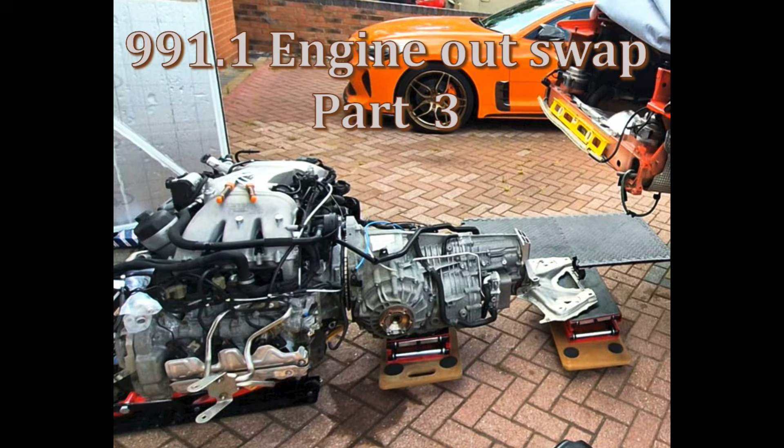Thanks for joining me. Welcome back to this series where I'll be removing and replacing, and then repairing eventually, the old motor in a Gen 1 991 GTS. So this is part 3 where I'll be hoping to install the replacement engine. Can I get it back on the road?

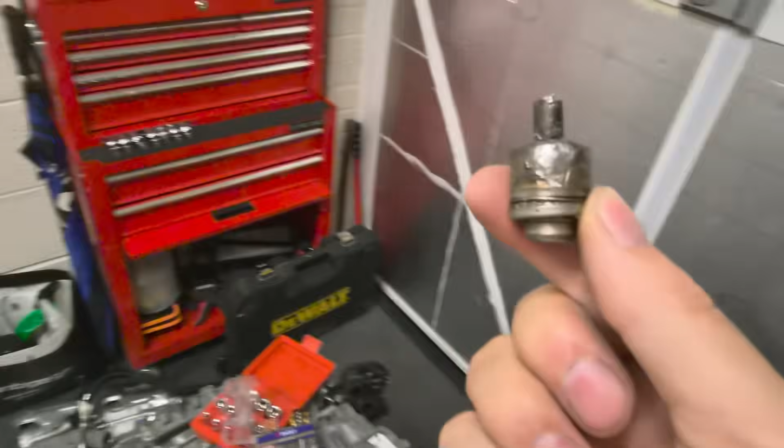Let's find out. Got to give you a quick update on removing this injector because I've finally got here, but what a nightmare. So I'll show you quickly. So first of all, this is the injector, which was getting more and more mashed with mole grips. I bought myself some oxygen and gas to heat the thing up, and that didn't help. Some people suggested heating the head, but obviously, how are you going to do that when it's on? All the heat just gets absorbed down here.

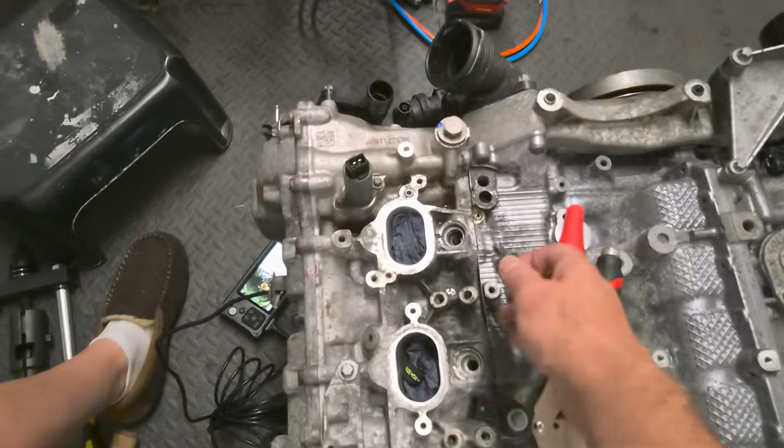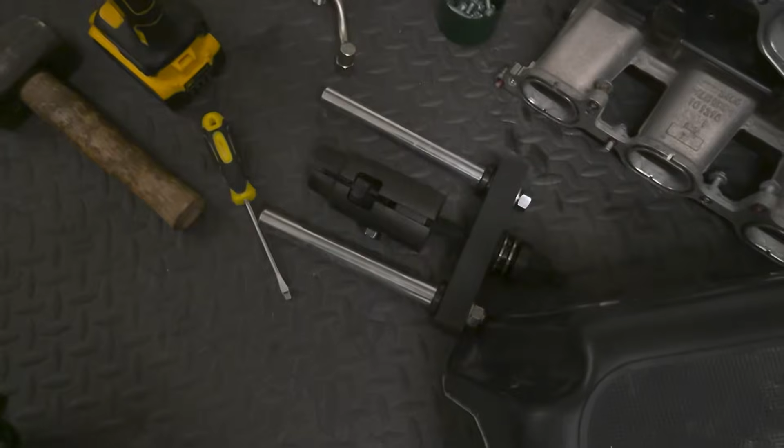Yeah, I got my little cheap extractor from Temu, which was pretty good. I don't know how they do these things for 20 quid delivered. Crazy. But unfortunately, the ends were just too big to get a grip in there. Anyway, so after heating it up, I then took the chisel to it and it started to bend out, and then finally I got the mole grips on it and it snapped, leaving a piece in there. So that's one of the broken bits off that injector too.

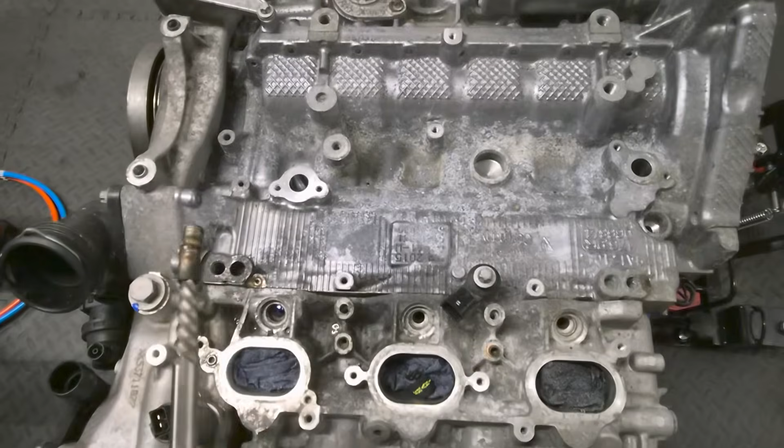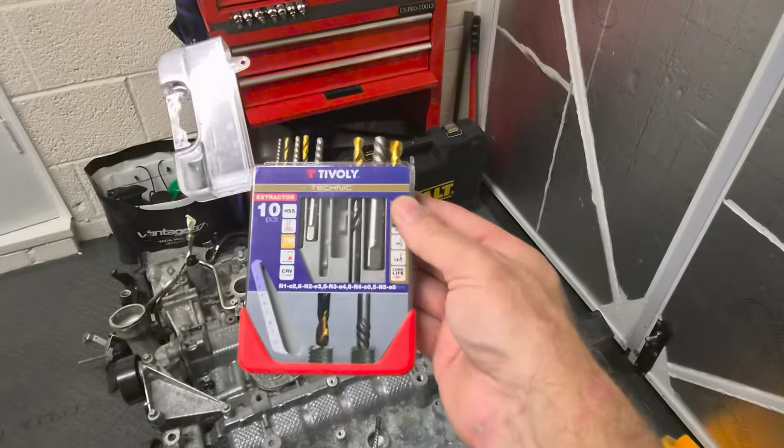And then I tried drilling in a little bit further and then getting this reverse tap in there, flooding it with oil, and reverse threaded stud extractor and pulling the thing out. Let me show you. It's a stud extractor, bolt extractor kit. So happy days.

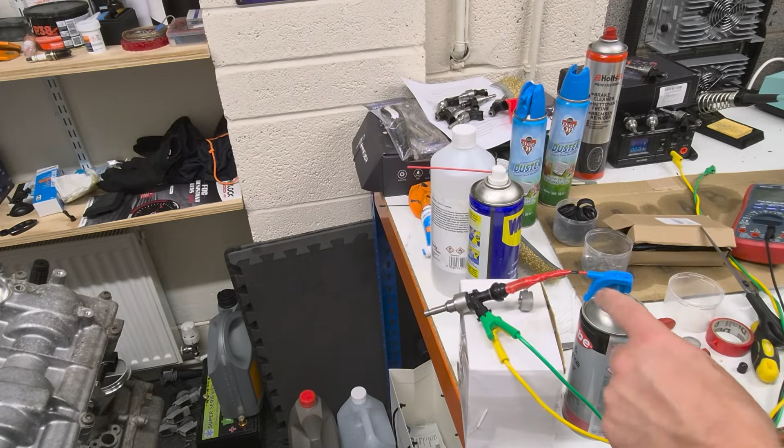So I'm just giving these injectors a good clean. I've got carb cleaner here going into the injectors, and I'm operating the injectors with a little bench power supply here. You can hear the solenoid clicking in, and so it's just a case of running this carb cleaner through it like so. So I'm just going from all like that, one at a time. And this little Heath Robinson device here, I've just made myself out of a tyre valve, which is then just taped onto the end of this carb cleaner.

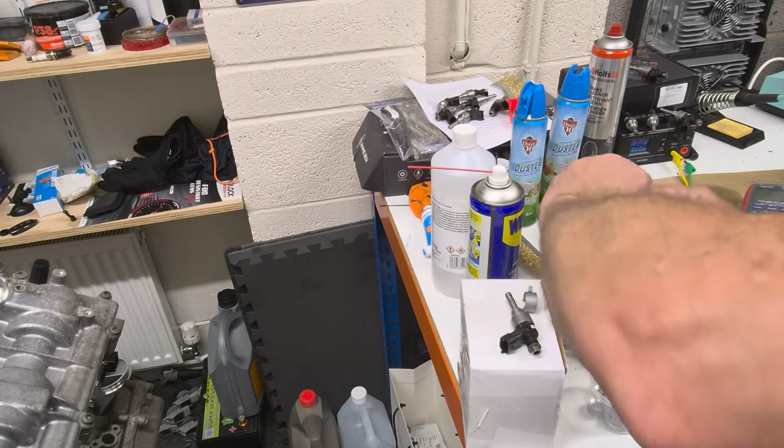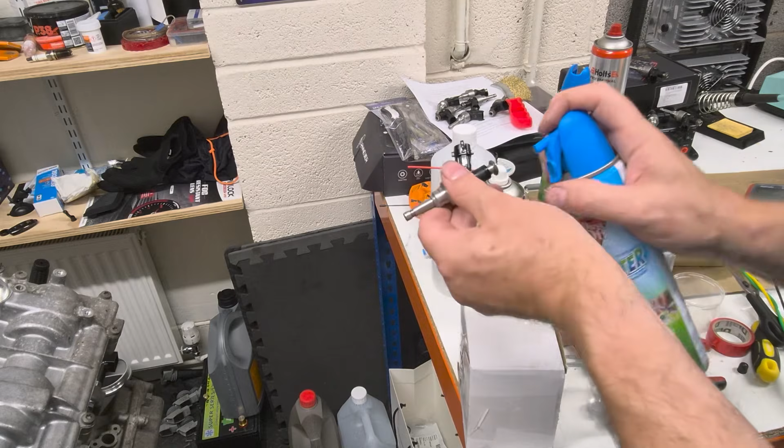All of the items around the injectors I've cleaned here with brake cleaner solvent, same with the rubber boots. So this is testing, giving everything a good clean, and then just to finish off, I'm just giving that a good squirt either side, a blast with some clean air.

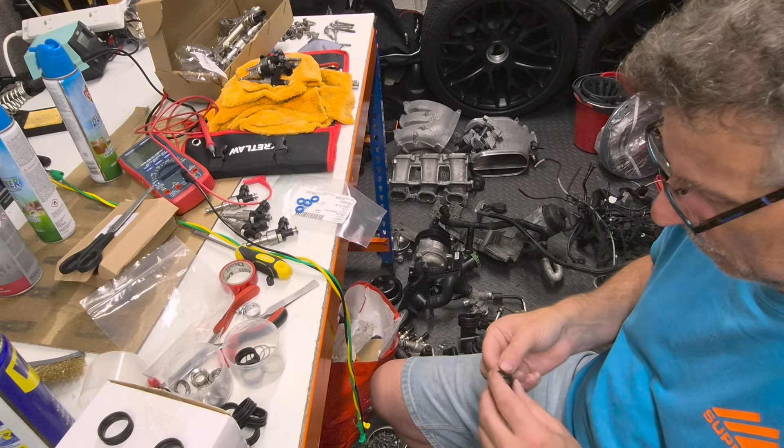So between the two engines, I'm left with 11 injectors after destroying that last one that was stuck. And of course, the one out of the original engine, cylinder 6, which had the hole in the exhaust valve, I was expecting that injector to perhaps not be working properly, causing that bank to run lean, but having cleaned and tested it, it was just working fine. So a bit of a mystery there. Anyway, it's time to treat the remaining injectors to new seals from Porsche.

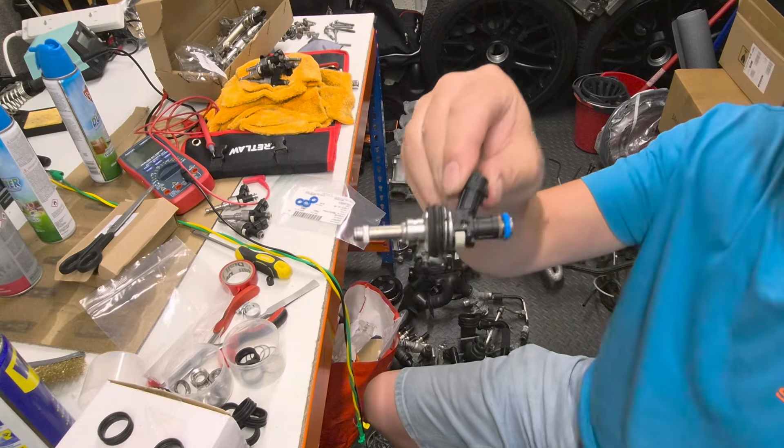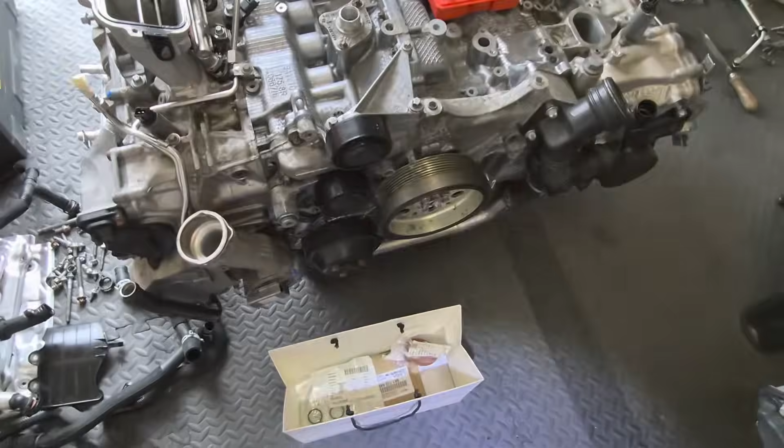Okay, it's engine ancillary assembly time. So I've got all my new gaskets there ready to go. I've begun a bit over that side, and yeah, I've cleaned up all the inlet valves, nice and shiny, or as best as you can imagine it's possible to get without specialist blast equipment. So yeah, let's get this job done.

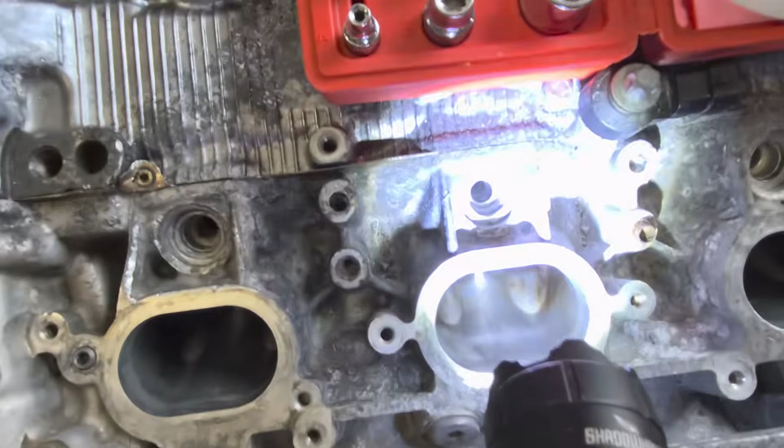Incidentally, you can see that stuck injector which was this side. If you compare the two, you can see that's got quite a bit of corrosion in there. I'm not sure if the torch highlights that, but yeah, I think I've already mentioned it, but the story of this engine was it was retrieved from a breakers up in Scotland, off a 991 Gen 1 GTS, on 46,000 miles. So I guess it's had a hard life with all that snow, ice and salt up there.

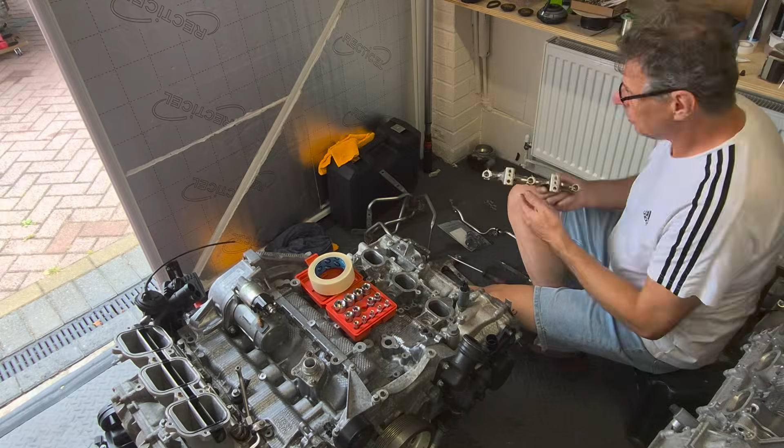So the new injectors here, I've got to slot them into the fuel rail first, and then the whole lot should slot in nicely onto the heads. So here they are, all nicely rebuilt and cleaned. And the way to get these into the fuel rail ends, as it's such a tight fit, is pop them in there first using a bit of dielectric grease around these seals. So we'll just pop each one in that way. Also, I like to get a bit around the bottom boot here, where it's going to seal up against the slot in the head there.

Okay, so I think I've got the right method here after fiddling with the other side, and let's get these springs in first, and then that lines the orientation of the injector up quite nicely, so its electrical connector is pointing in the correct direction. And it's just a case of wiggling these in, and there it goes. It should go quite nicely with a bit of that dielectric grease on it.

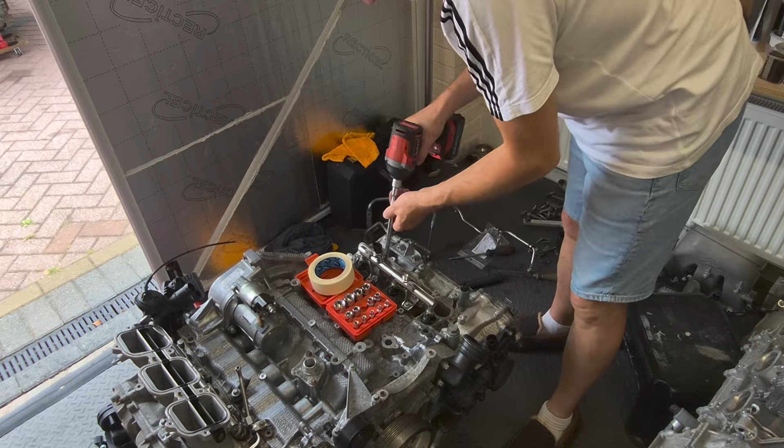Then we've got to push the rubber boot down into place. Hopefully with some of that additional dielectric grease, it might stop any corrosion in the future.

What a relief to have got that injector out after all that. That's set me back about 4 or 5 days now, believe it or not. So yeah, absolute joy to get that out. But yeah, I was literally that close, having resigned myself to taking that head off to sort that. So yeah, it's a miracle I didn't end up going down that road. Okay.

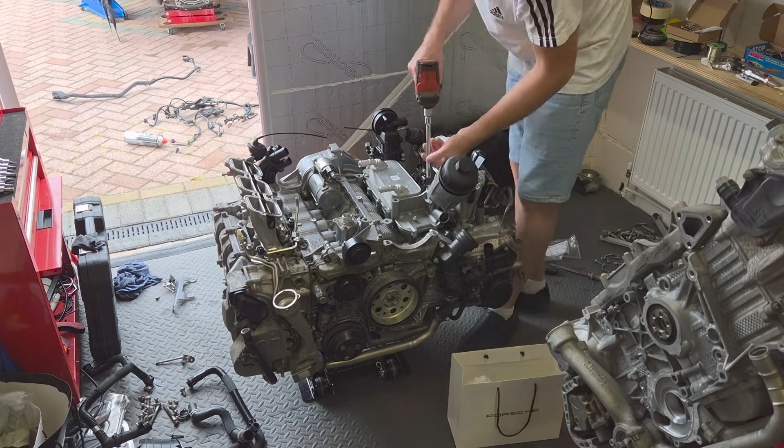Speeding things up then, the remaining assembly of the engine. So I'm just putting the heat exchanger on with oil filter assembly there, with new seals of course. So that goes on as one complete unit. Then I'm just putting the 12 volt cables there for the alternator and starter motor, which join together and then go out the back of the engine.

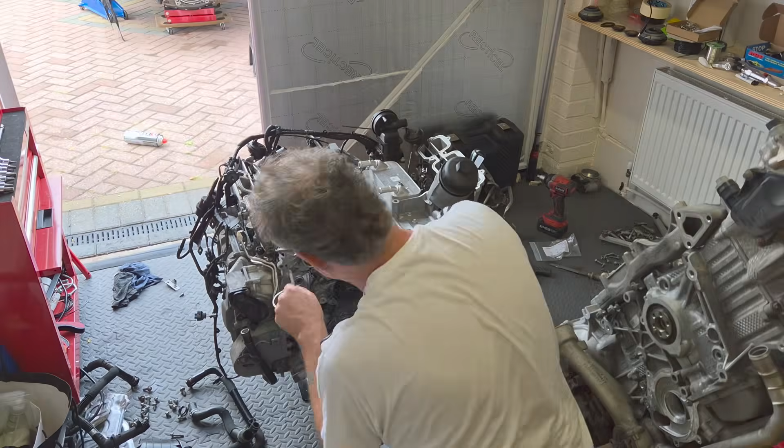Now I am starting to line the engine wiring loom up along with all its attached vacuum hoses. So it's really important to get everything in the right order there and clip it all down in the correct places. Anything in the wrong place would just be a total nightmare, so I'm really going to take my time with that.

Yeah, so I've just torqued the alternator down now, and so it's ready to start threading all of this through into the correct positions, especially taking some time with those vacuum hoses as well, because they're quite complicated, and of course nothing is marked up there, and there's an awful lot of vacuum solenoids that need to be in the right place, and the pipes need to be in the right place as well on the top of that engine.

So on goes the oil feeding T-pipe. One side of that goes the oil top up cover, and it tees off to the centre of the engine and to the cam, one of the heads, I believe.

On goes the air compressor. You can see on the air compressor I've popped plastic bags to seal the hoses on that. It's important to keep the atmosphere out of that air compressor, because the lubricant and any gas left in there is all hygroscopic, so the last thing you want is that being exposed to the atmosphere.

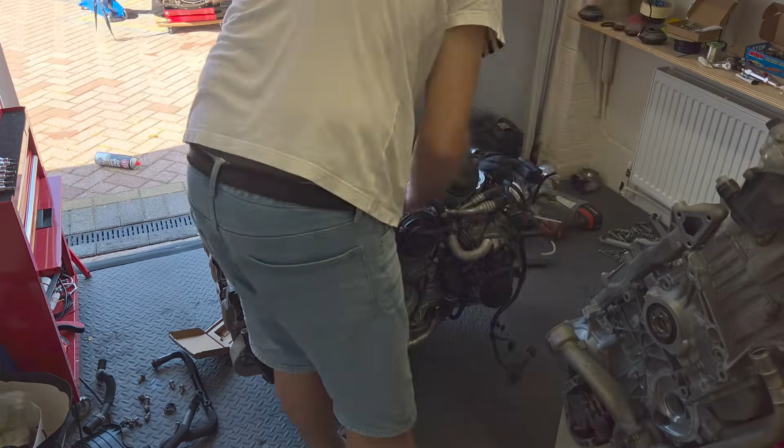So now I've put the spark plugs in, and I've put the coil packs in, and now I'm connecting the engine loom to the coil packs, and then I'll be putting the covers on the coil packs there each side. So that's bank 1. Now starting on bank 2, doing the same thing. And yeah, really taking the time there to thread the wiring loom and vacuum pipes around the right way.

That's the high pressure fuel pipe going on, being torqued down. Hoses for the oil cooler, and then I'm just looking at putting the induction system on there. The induction system is quite complicated and there's quite a lot of seals on there, so on go new seals, and then it's a case of assembling that induction assembly.

And of course that induction assembly has several vacuum hoses attached to it through solenoids, so I've also got to wire and route those hoses correctly and get the hoses in the right place, attached to the right solenoid actuator. So on goes the rest of that, and then I'll be looking at putting a new seal on the throttle body and attaching the throttle body.

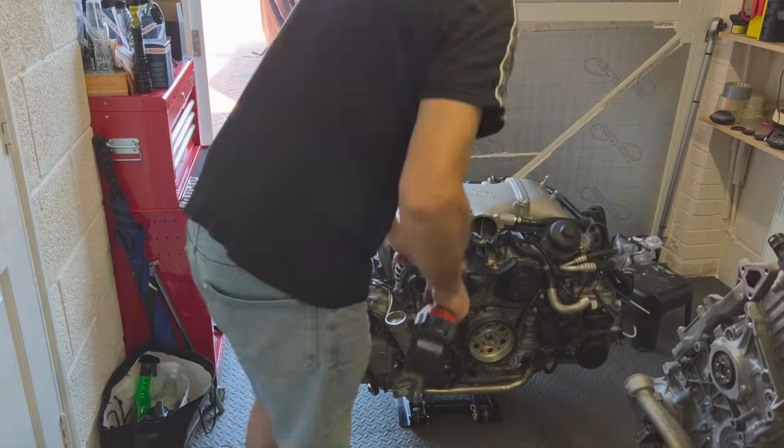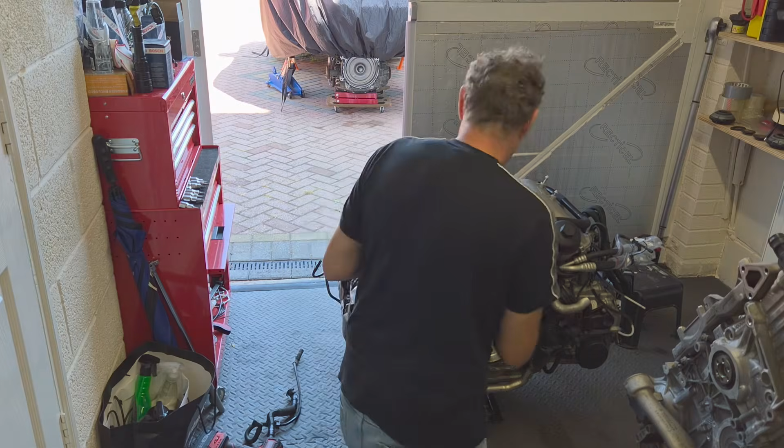That's the fan belt going on there, so I'm just taking the pressure off of the fan belt pulley and threading it round the right way. I've put a new damper on that fan belt. I think the old one was leaking, so I've got a new fan belt damper from Porsche.

Yeah, there's the throttle body finally going on there. And of course the remaining vacuum actuators for that inlet manifold, and then that's pretty much the engine nearly done, I think, from memory.

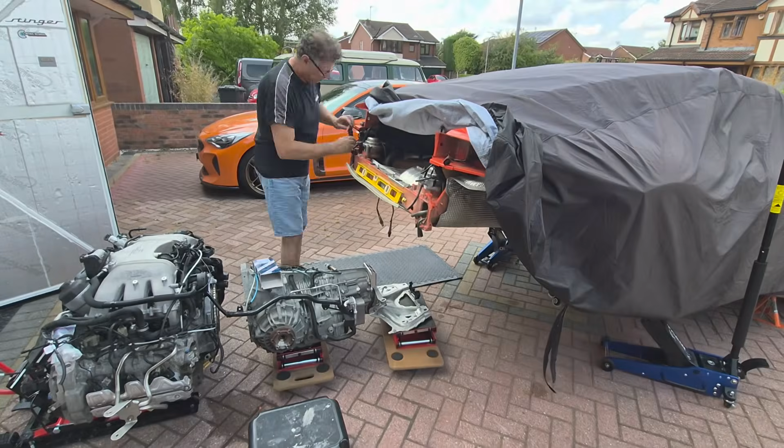So I've wheeled the engine out and brought the gearbox forwards there. Right now just fitting new lambda sensors, upstream lambda sensors to both sides. It's quite a cheap thing to do, and it's just precautionary really, because the previous engine appeared to have been running slightly lean. That's all I can imagine that could have caused that damage to that exhaust valve.

But yeah, so I've just replaced the lambda sensors, and now I'm looking at mating this gearbox, and there is a dowel that's stuck in the engine and the gearbox, both opposing each other, so one of them has to come out, and I need to use a bit of heat there. That's what I'm doing there, and some mole grips to get one of the corroded dowels out, and then once that's out, I can line them up and start mating the gearbox.

So I'm really going to take my time doing this. The last thing I want to do is strain the input shaft in any way. That's just simply not going to be good for any of the seals or the input shaft. So take my time to get everything in the right place before putting the bolts through.

Just a shout out for if anyone out there in the community thinks they can help. To actually repair the old engine, take it apart, I'm going to need a couple of specialist tools. In particular, a camshaft tool, timing tool, and a tool to put the gudgeon pins in and line the clips up. So if anyone can help with that, please let us know. Leave something in the comments. I literally only need to borrow something for a couple of hours for a day.

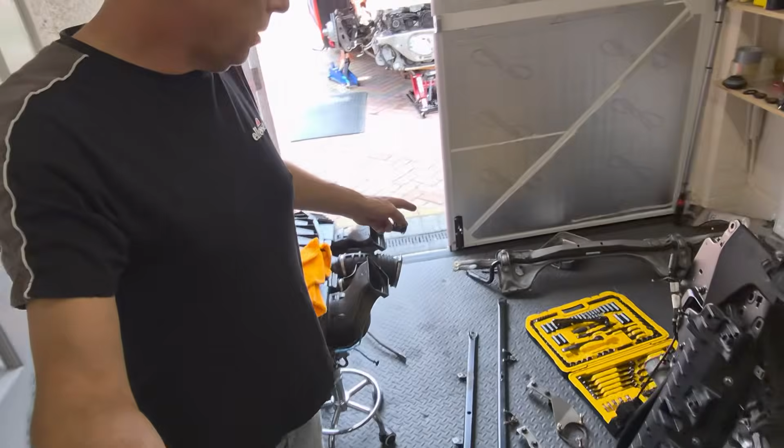Good morning, it's another day here, and I'm blessed with some nice weather again. I've got fresh engine oil in the engine. I've cleaned the injectors. I've put new upstream oxygen sensors in. New oil filter, air filter, it's all good to go. I've given all the ancillaries a clean, like the airbox and the cross members and other bits and pieces that you could normally not get to very easily. I've lined the engine up and it's ready to go. Let's take a look.

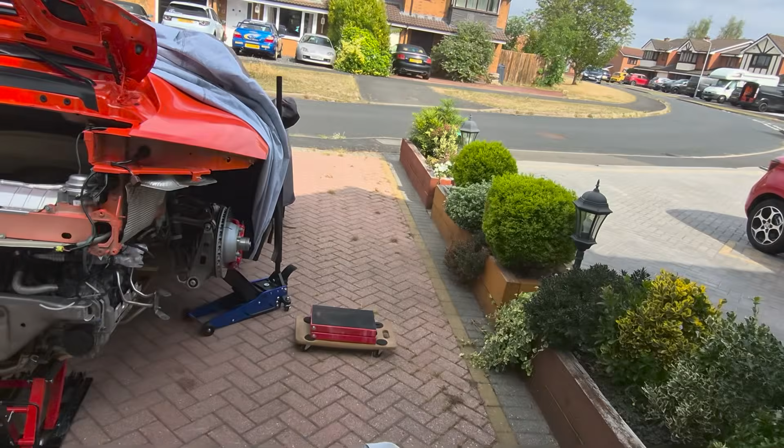So the plan is to just jack it up a little bit higher as far as I can go, and then drop the car body onto it, connect it all up. I don't think I'll connect everything. I'll leave the cross member and other bits and pieces and exhaust off, and just get the thing started, make sure it's running okay from that point. So here we go.

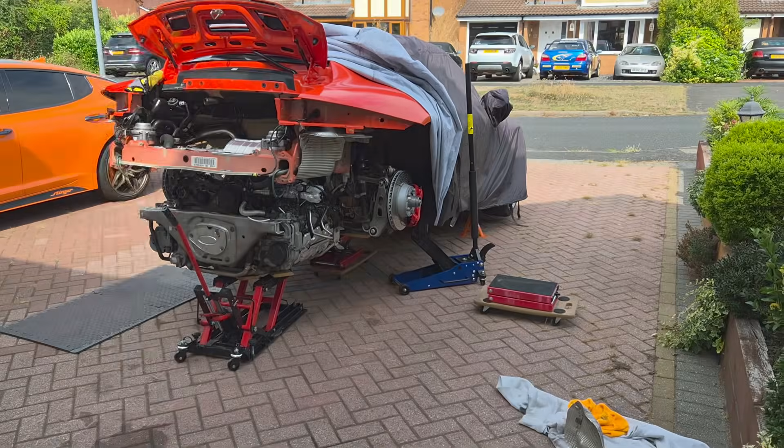So yeah, it's not really rocket science, but it's just really a case of taking one's time, making sure everything lines up perfectly, so that as you drop down, everything's going to be in the right place. All the hoses and any electrical cables are all going to drop down into the right place. So that's all I'm doing here, just being very cautious, observing both sides each time I come down, making sure nothing's going to get trapped and then either end up broken or just in the wrong place.

So there's various hoses, mostly for the heating. There's two hoses that go off to the heating, and there's your fuel hoses and the gearbox neutral selector cable. The gearbox has a wiring loom dropping down onto it from the cabin, separate to the engine compartment. So it's all got to come down in the right place.

Yeah, from memory, and of course everything needs to be lining up so I can do the engine mounts up and gearbox mounts up nicely, which I've now done. So now I'm just taking my time to do all the cooling hoses up, and the vacuum hoses in the engine bay there. From memory, I think the only issue I had was when I was connecting the gearbox wiring loom up, there seemed to be a plug going nowhere, and I do recall spending quite a long time scratching my head wondering where on earth it went.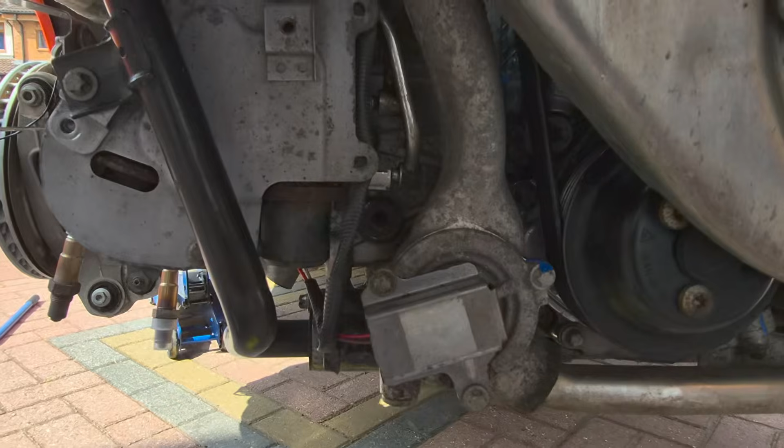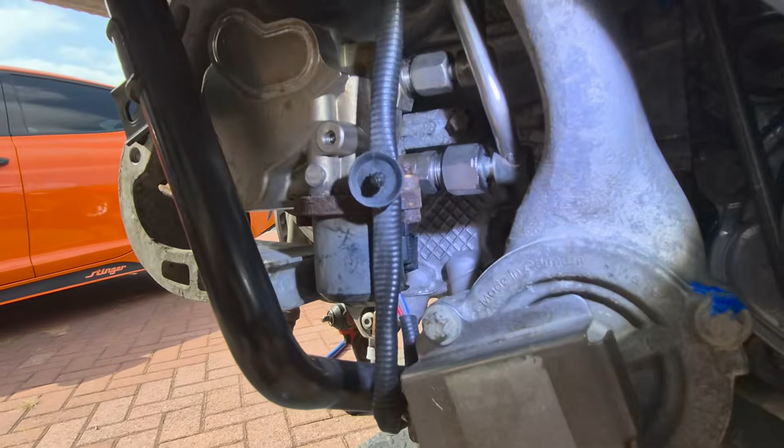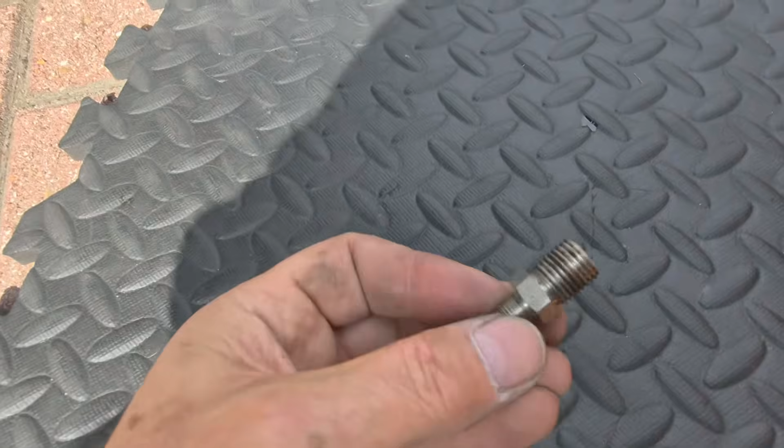Oh my god, an oil leak, petrol leak. The high pressure fuel line. Okay, I got to the bottom of this. That pipe screws into the end of an insert and that insert was broken, which is this here. It has a hairline crack on it. I don't know if the camera can pick that up. There it is. It's just there. Can you see that hairline crack there where the top of my thumb is?

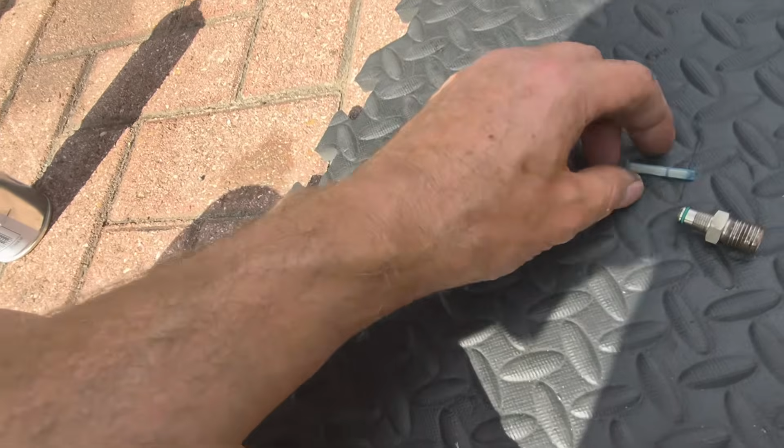Incidentally, this is quite interesting actually. That insert there, which I hadn't realised. I've lost it now. Where is it? There. It has a little cleanable fuel filter that goes in here, so that's quite interesting. Didn't realise that. So I've taken the one out of the spare engine and popped it in there after giving it a good clean up.

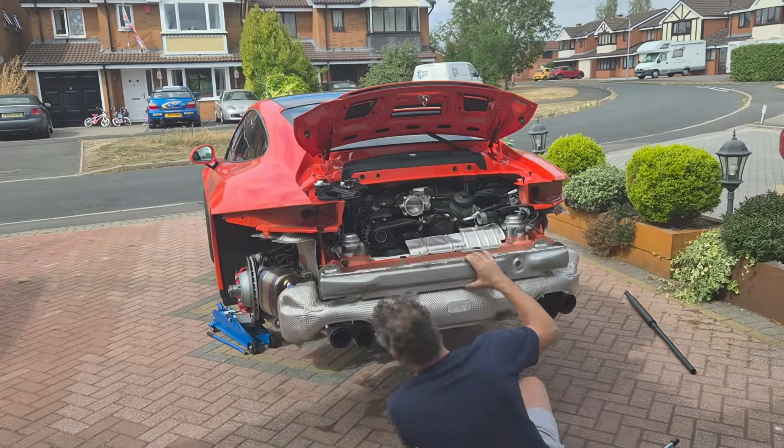So with the final checks out the way there, last run, it's time to finish the reassembly, putting the heat shields back on, followed by the wheels. I don't think you can see in this sped up bit, but when I come to do the wheels, the locking wheel nuts, the centre locks, I use some Castrol LM lube on them before putting them on and then torquing them as best as I can in the air.

A couple of people asked me about the axle stands in the last video. I had two jacks on the back and two axle stands on the front. On all four jacking points I used jacking point pads so that there was no metal to metal contact. Resting on the front axle stands, the rear would actually balance on a single jack, but I used two, so there was always one for redundancy, so it was quite safe. That certainly didn't want to come off the axle stands, did it? The problem was that I had 3 sets of jacks and I was only left with 2 because one of them developed a leak. Anyway, it's off.

I don't know if anyone's ever looked at putting their GTS or centre lock wheels on, but it's just worth pointing out. It's a case of having to torque these to an extraordinary amount, 600 Newton meters. The Porsche way to do it is to have it on a centre lift so all 4 wheels are off the ground, and then get somebody to sit in the driver's seat and stamp on the brakes and then torque it up that way.

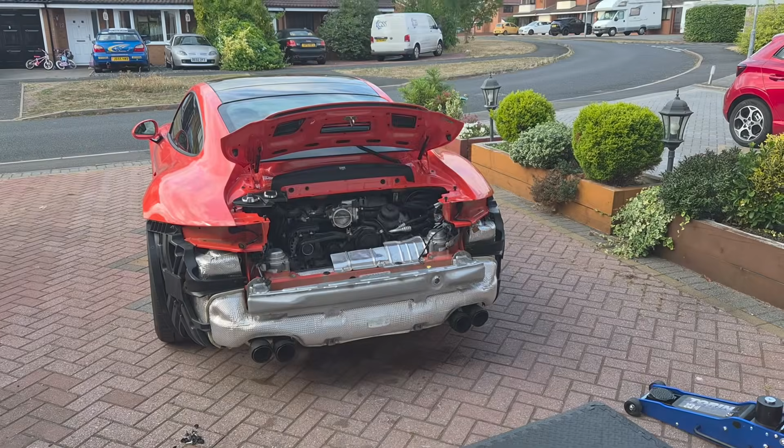So with those final bits done, it's time to finish the last reassembly, which can be done with the car sat on the ground. Air filter box on, rear bumper on, and then the lights can go on and the tow tower. That's pretty much about it.

What I neglected to actually film is, prior to just this point, I actually did a pressure test on the cooling system using my bleed kit, and just ran it up to 10 psi and left it for half hour, just to make sure that nothing had leaked out, but it was fine, so that was good. There, it's complete, and it's ready to start test driving now. So I'm going to give it a good test drive.

I've filled it up with the Porsche recommended 0W40 Mobil oil. That's this stuff here. And yeah, I know that this is probably a little bit anal, but I'm going to do 100 miles or so in that, and then I'm going to change the oil and filter again, just in case, because that engine has had God knows how long sitting on the shelf in the breaker's yard, subjected to God knows what environment, and it's been, you know, semi apart. It just seems the thing to do.

Then I want to fill it with the improved oil that lots of the big engineers like LN Engineering, and I think even Hartech possibly, are recommending these days. It's this stuff up there called Driven DT40 5W40. Now that's been developed with a higher moly and zinc content over what you'd normally find in those Porsche approved oils, and apparently research has shown that that can help these Alusil and Lokasil engines.

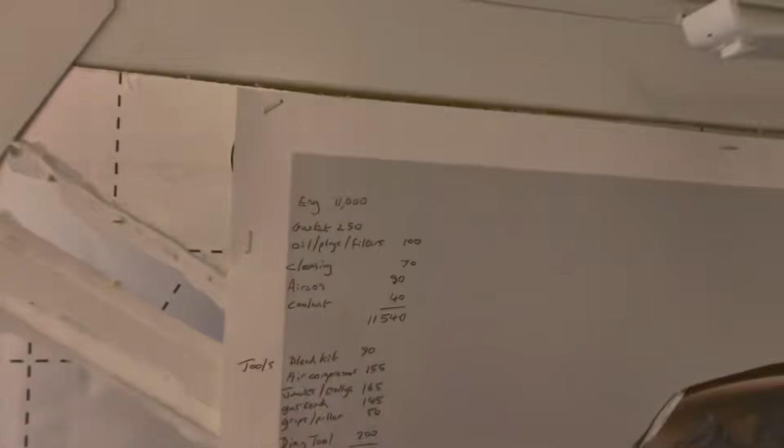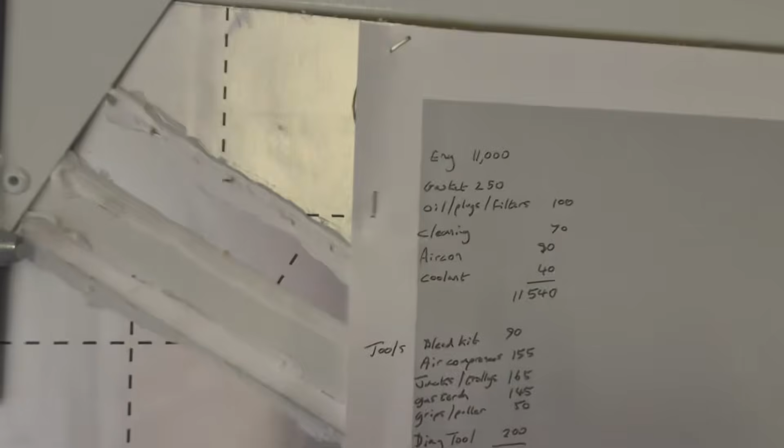So the engine was £11,000, and I've spent £250 on gaskets. Other things like oil plugs and filters, it's £100, but actually I've spent a further £120 now on that DT40 oil as well, so that should be added to that, to be fair, and that's missing. Then we've got the other things like cleaning the engine and gearbox. I've spent £70 on cleaner to do that. I recharged the aircon, which cost me £80.

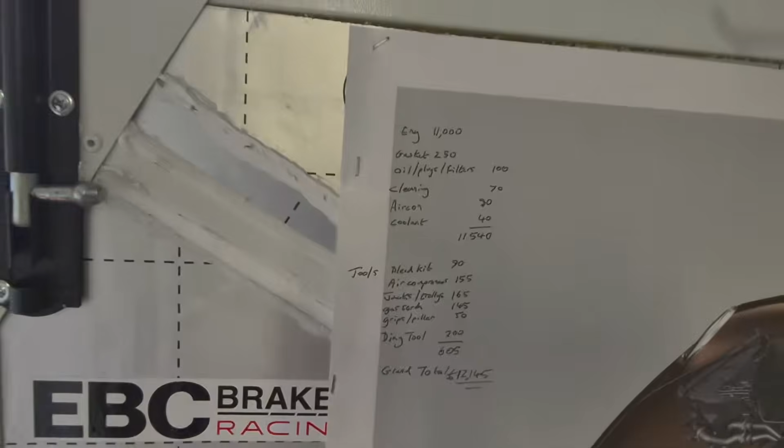I don't think I mentioned that actually. Just quickly before I completely forget, I've done it with this stuff here that you can pick up online or from Halfords to do yourself. It's quite easy and straightforward, but when I get round to having its next service book stamped by a Porsche dealer, I'll probably ask them to drain and recharge it again. It's always good to have them do it because you get the lube and they ensure there's absolutely no moisture in there, because any moisture in the aircon is just so bad for the system. So that's why it's always a good idea, because that gas is hygroscopic apparently.

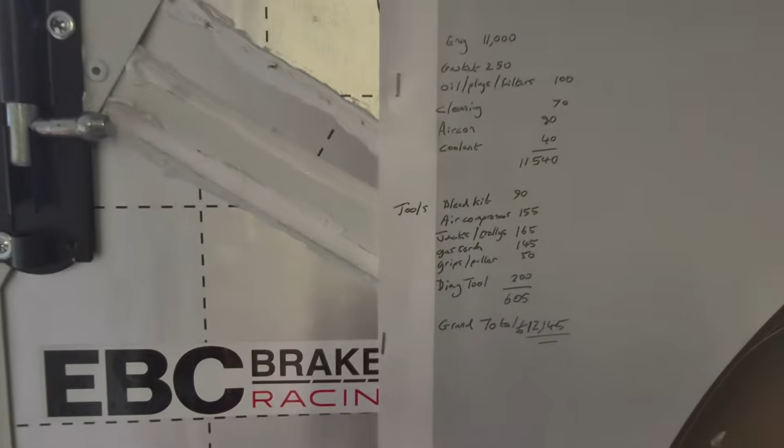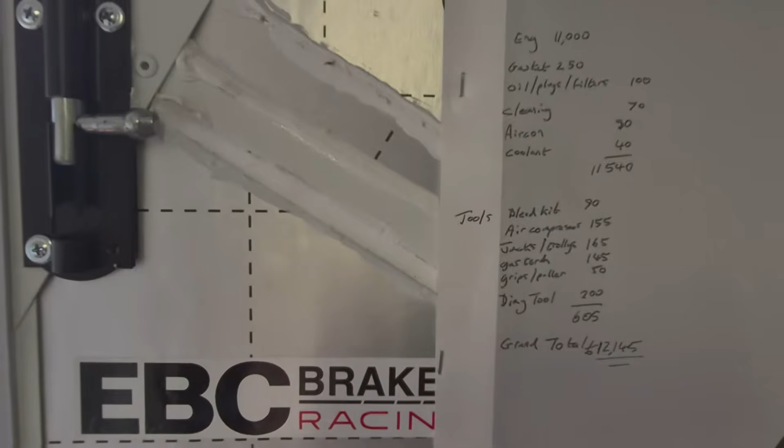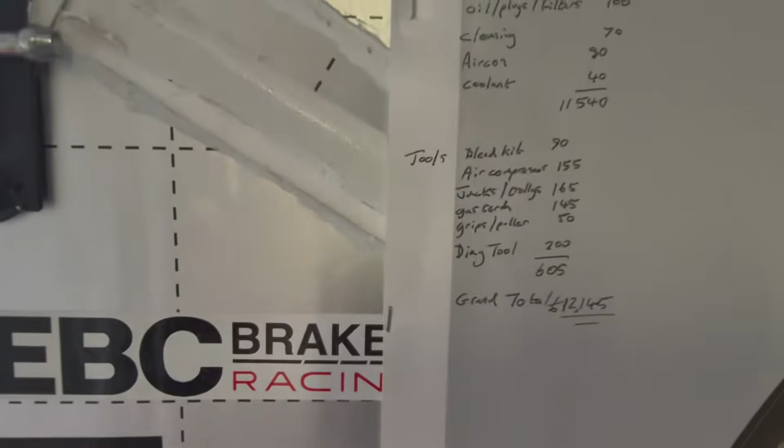Yeah, so what we got then, we got the coolant. Then of course a bit of money has had to go on specialist tools so far. My bleed kit came at £90. That air compressor with the extra tank, 155. 165 on jacks and trolleys. A gas torch with its gas and oxygen, which proved unnecessary, but I've got that forevermore now, 145. So there you are. So total spent to get this car back on the road, £12,145.

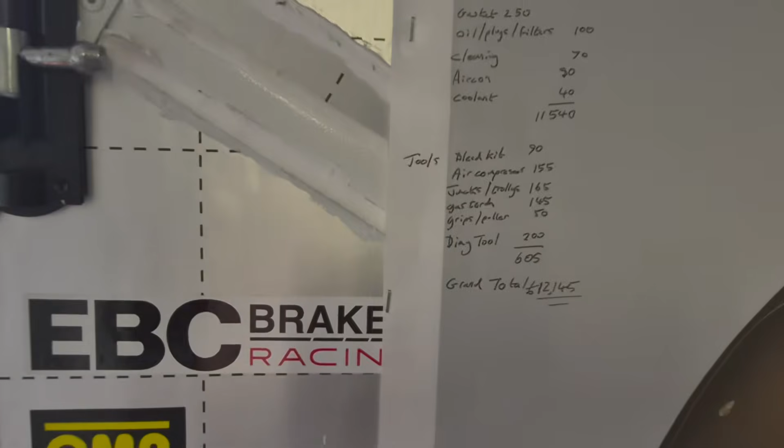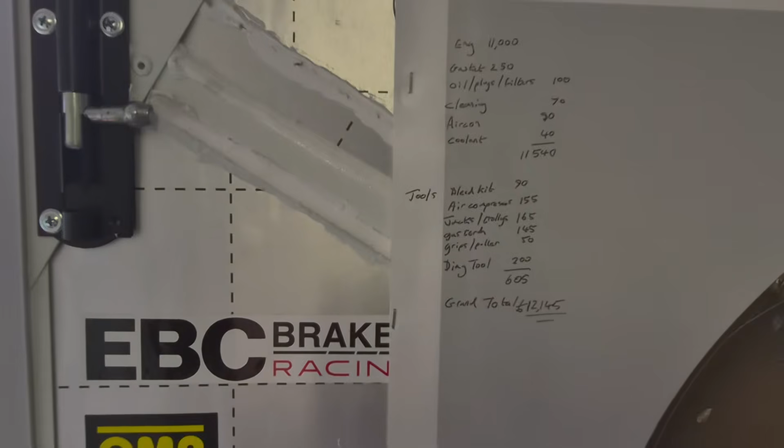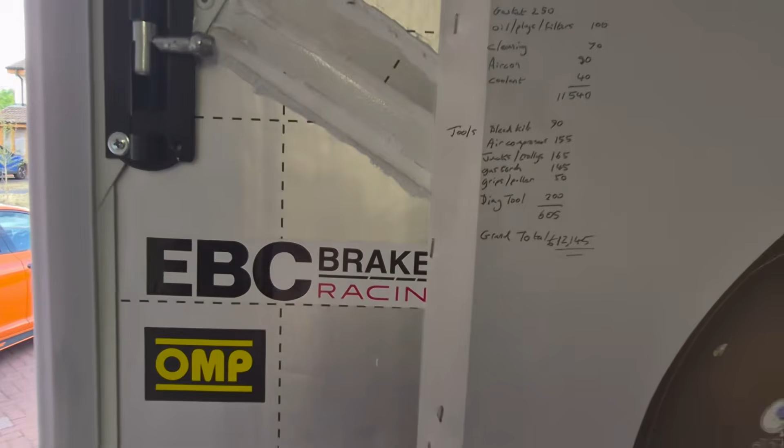Now, I was probably being quoted 15,000 plus, maybe 16,000 with extras, plus the labour for RPM Technic to do a Porsche engine swap, but of course they couldn't get the engine from Porsche any longer, no longer available for this particular 991 generation. And so they were talking about rebuilding it with a new bottom half block, and then we were probably looking at 25,000 easy there. So there's been some good savings there.

And of course, I've now got this engine spare, which I'm going to now rebuild, and I shall be filming the endeavours to do that. And at the end of the day, I've got a tip-top restored engine, almost as new, as good as a factory refurbed engine. If I can get to that stage, then that engine on its own's worth at least 20,000. So that's certainly going to be worth doing, and I'll have a spare engine forevermore.